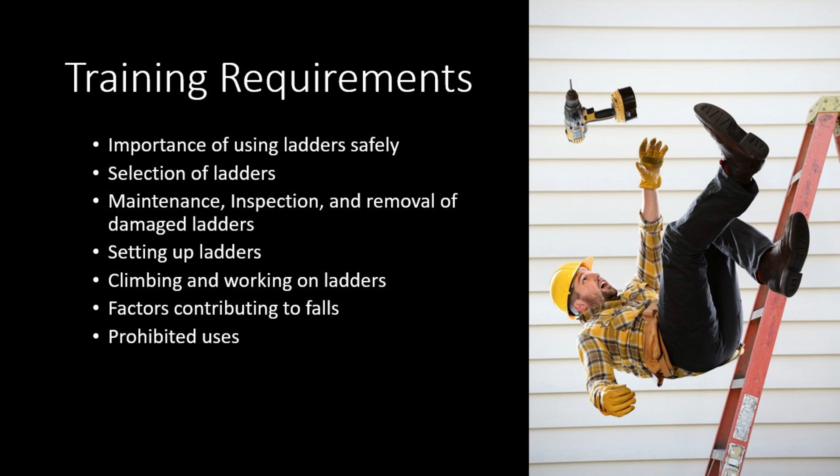The importance of using ladders safely. Do any of these numbers surprise you? Approximately 300 people die each year from ladder-related injuries. About 165,000 Americans require medical treatment for ladder-related injuries each year. Of those, almost 10% result in hospitalization. The most frequent injuries were fractures to legs and feet, and most accidents happen at home.

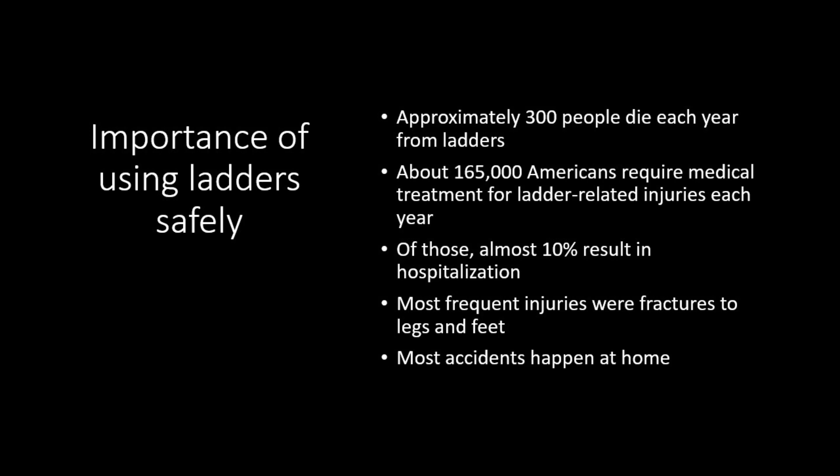Let's put that last slide into perspective. The most common ladder used is an 8-foot ladder, and the highest step to safely stand on would be approximately 6 foot high. A fall from 6 feet can generate as much as 2,400 pounds of force. That is a lot. A fall from a ladder is a lot more dangerous than you may think. People have died from falling even as little as 4 feet off a ladder.

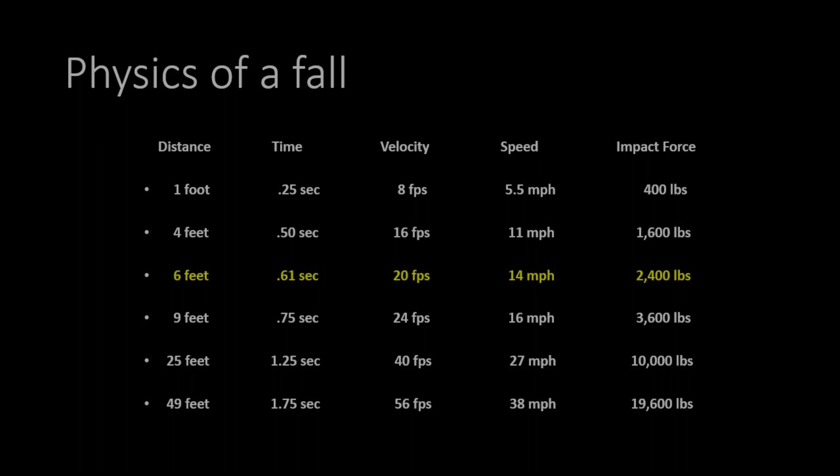Now, selecting a ladder. Employees shall only use Caltrans-provided ladders. Make sure you are comfortable ascending and descending the ladder provided. You cannot use a ladder brought from home, and definitely not a ladder you found on the freeway. Always use a ladder that is appropriate for the job task. Ladders shall be selected, and their use restricted, to the purpose for which the ladder is designed.

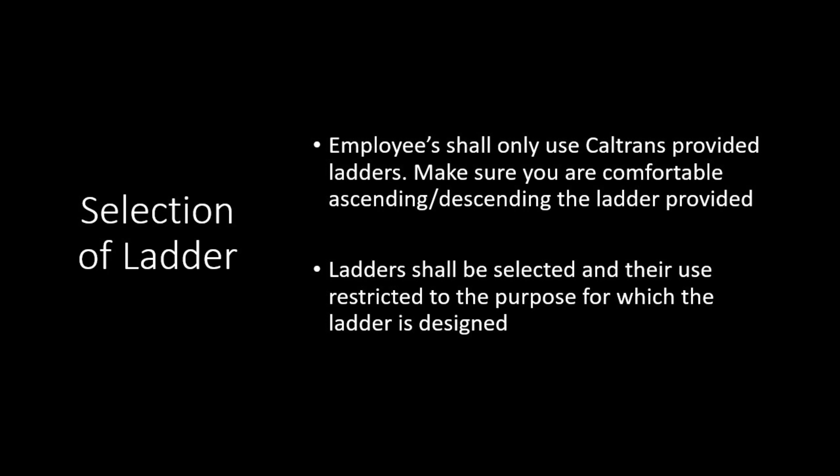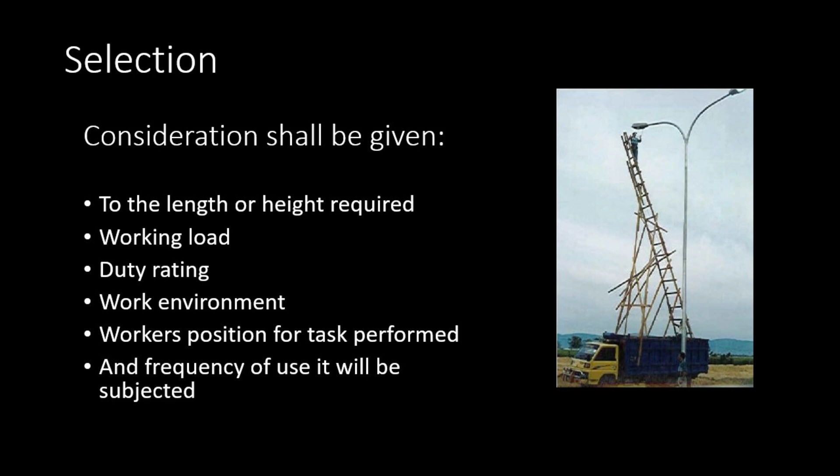Consideration shall be given to the following: the length or height required, the working load, the duty rating, the work environment, the worker's position for the task to be performed, and the frequency of use the ladder will be subjected to.

Now would be a good opportunity to pause this video and take a look at the ladders you have. Go ahead and pause now. I can wait as long as you need.

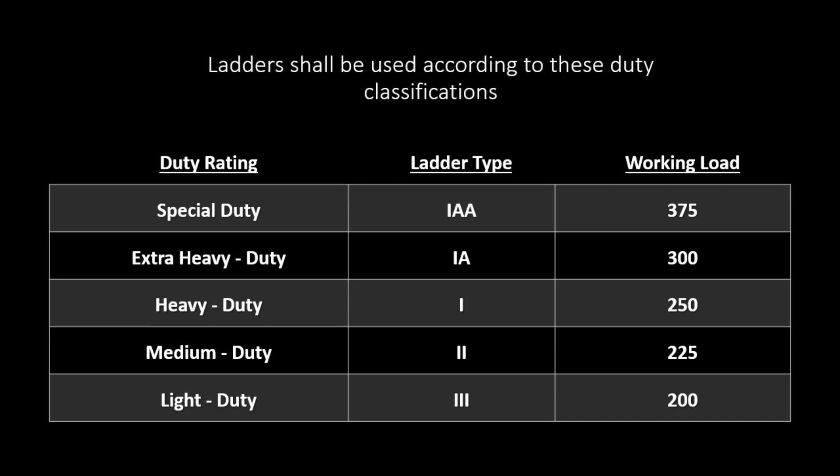Many ladders are color-coded. Heavy-duty ladders, Type 1, are blue and have a working load limit of 250 pounds. Extra heavy-duty ladders, Type 1A, are orange and have a working load limit of 300 pounds. Remember, it is not just your body weight. Also factor in such things as tool belts, gear, or other equipment you may have on the ladder with you.

Ladders shall be maintained and in good condition at all times. The joints between the steps and side rails shall be tight. All hardware and fittings shall be securely attached. Movable parts shall operate freely without binding or undue play. All safety and warning stickers must always be legible, or the ladder should be removed from service.

Ladders shall be inspected monthly by the supervisor for visible defects and after any occurrence that could affect safe use. Always inspect ladders before you use them. Even after a monthly inspection, something may have happened to the ladder since the inspection. Remember, you are the one climbing the ladder. Just like you would pre-op your vehicle before operating, the same goes for a ladder.

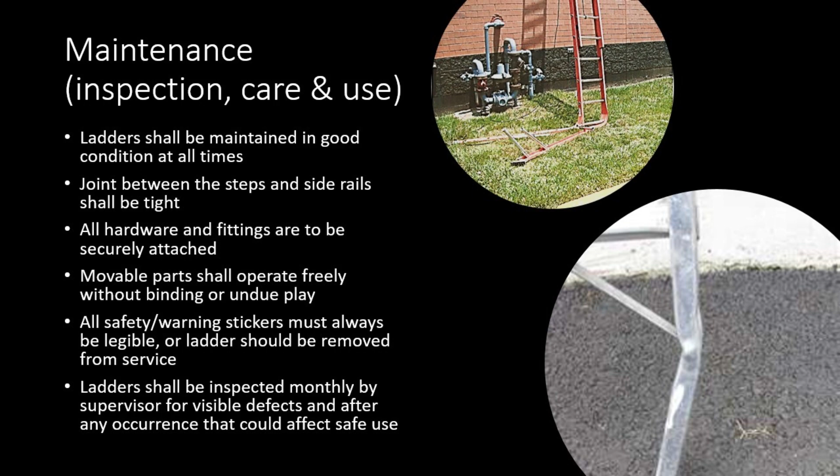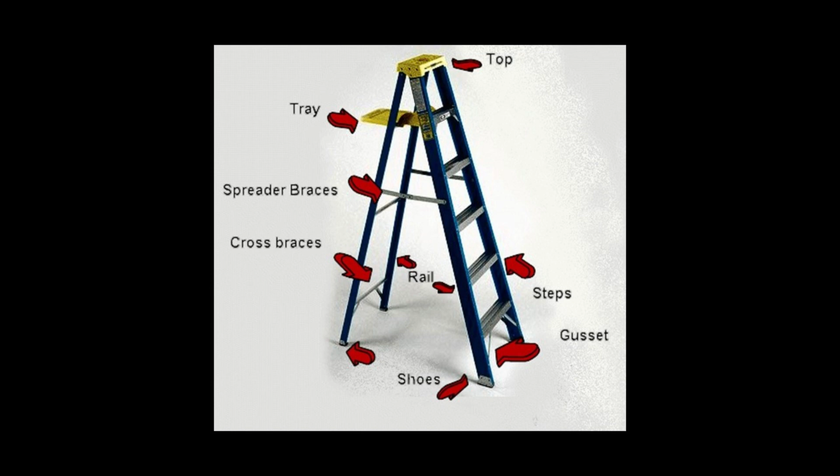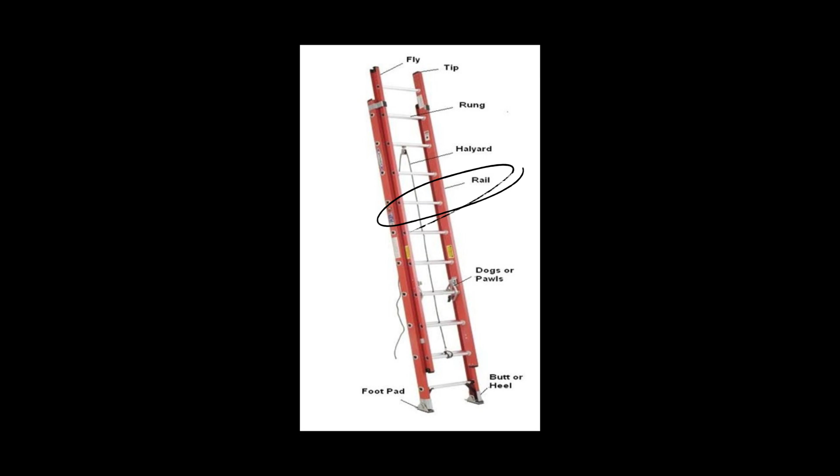Here are the various parts of a ladder: the top, the tray, spreader braces, cross braces, rails, steps, gussets, and at the bottom, shoes. This is a typical extension ladder. The fly is the section of ladder that extends up. The halyard, or rope and pulley, are used to raise the fly. There are rungs and rails just like the previous example. The dogs or pawls are what locks the fly at the desired height. And finally, at the butt of the ladder, or heel, there are foot pads.

Inspections, care, and use. Templates for ladder inspections can be found online. I placed a link to one in the video description. You can always ask your management for one too.

Just like fire extinguishers and eye wash stations, these inspections should be done monthly. They shall be legible and readily available at all times. If a defect is discovered, take the ladder out of service until it can be repaired. If the ladder can't be repaired, you must destroy it.

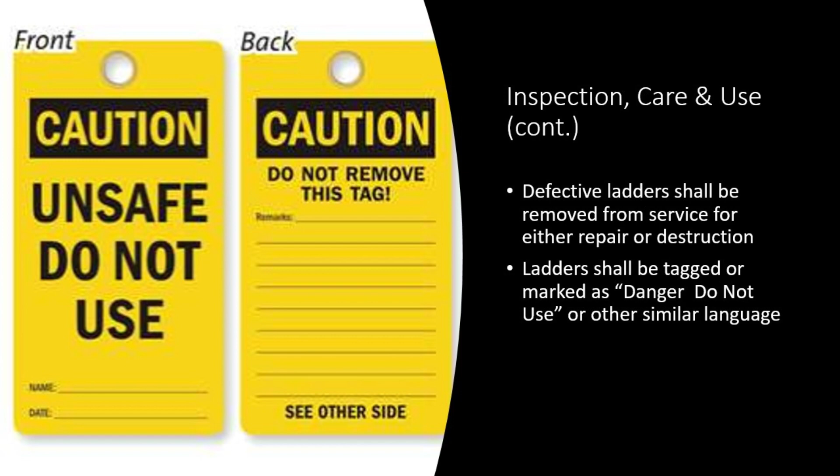Do not throw a ladder in the dumpster in one piece. Always destroy it to prevent the ladder from being used again. Use a loader bucket, a sawzall, or other means to destroy it. Defective ladders shall be tagged or marked as 'Danger, do not use,' or other similar language.

Ladders shall be free of oil, grease, or any slippery material. Wooden ladders shall not be painted with anything other than a transparent material.

Question: if you painted a wooden ladder with anything other than transparent paint, why might that be a problem? Well, the solid color paint could hide cracks or other damage to the wood. The ladder may have hidden defects, and you might not know.

Be sure you find a ladder that is appropriate for the job. Portable ladders shall not be overloaded when used. Ladders shall not be placed on boxes or barrels, on equipment, on furniture, or other unstable base used to obtain additional height. Let's pause a moment to take a look at your ladders.

Have they been inspected recently? Are there any defects you can find? Are the manufacturer's labels legible? Let's pause here to check.

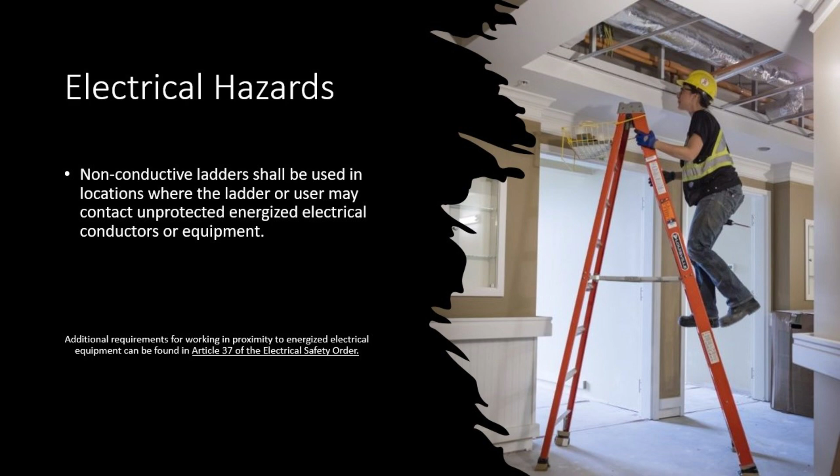Setting up ladders. Non-conductive ladders shall be used in locations where the ladder or user may contact unprotected energized electrical conductors or equipment. Never use aluminum ladders while doing electrical work.

Ladders shall be placed on a firm and level footing. Ladders shall not be used on ice, snow, or slippery surfaces unless suitable means to prevent slippage is in place.

Uneven ground is common along the shoulders of our roads. This is an issue for crews that deal with the installation and repair of signs. If a suitable surface is unavailable, you should not utilize a ladder at that location.

Do not place ladders in doorways, driveways, or locations where it could be displaced, unless you protect your workspace with a suitable barricade. You don't want someone opening that door while you are on the ladder. Maybe you are in a warehouse or shop that may have a forklift driving through. Be sure to protect your workspace. A lookout could be utilized for protection where cones or other barriers are insufficient.

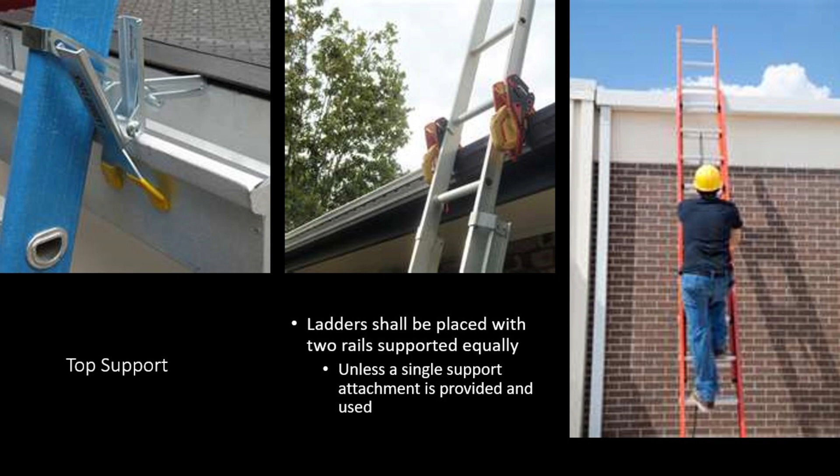Extension ladders shall always be erected so that the top section, the fly section, is above and resting on the bottom section with the rung locks engaged. On older ladders, it is sometimes hard to determine if the ladder is forward or backward or even upside down because older extension ladders had round rungs. Newer ladders have flat rungs that are usually at a 45-degree angle, so you can only use the ladder one way.

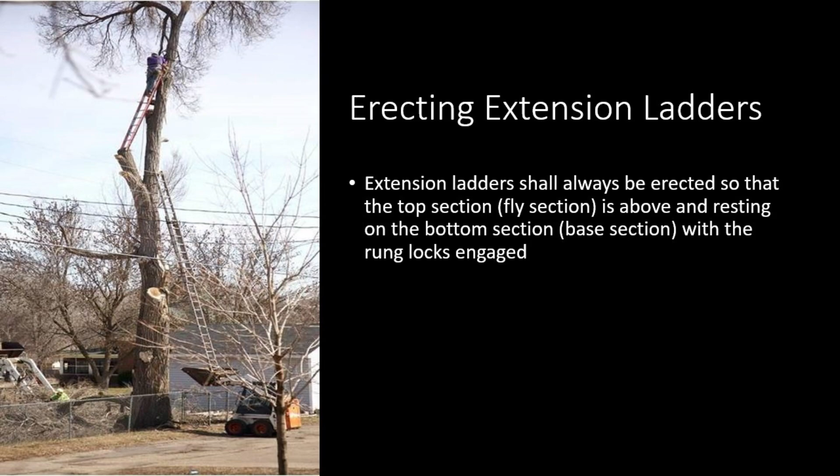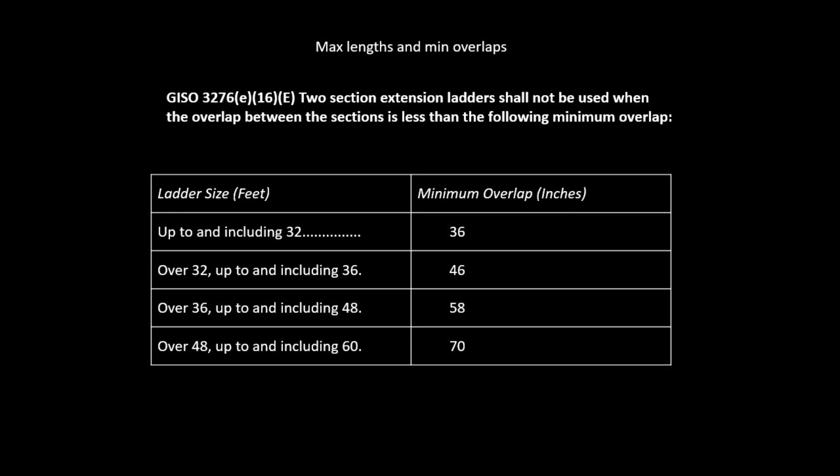The 4-to-1 rule. Where possible, non-self-supporting ladders shall be used at a pitch so that the horizontal distance from the top support to the foot of the ladder is 1/4 of the working length of the ladder. Otherwise, it shall be tied, blocked, held, or otherwise secured to prevent slipping.

If the ladder is out too far, it could change the load capacity and cause weakness in the center of the ladder. If the ladder base is too close to the wall, it could fall back when you reach the top. This is an example of a 1:4 ratio. For every 4 feet up, you need 1 foot out from your step-off point.

Okay, pop quiz. If you were using a 16-foot ladder, how far from the wall should the base be set? The base would need to be 4 feet from the wall.

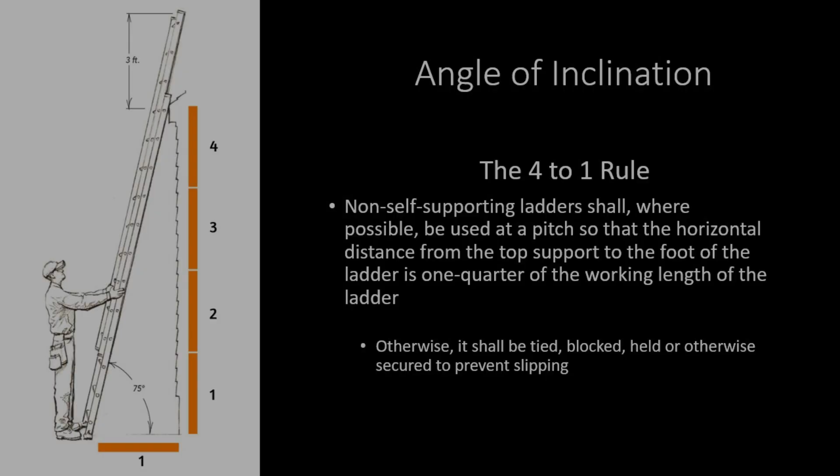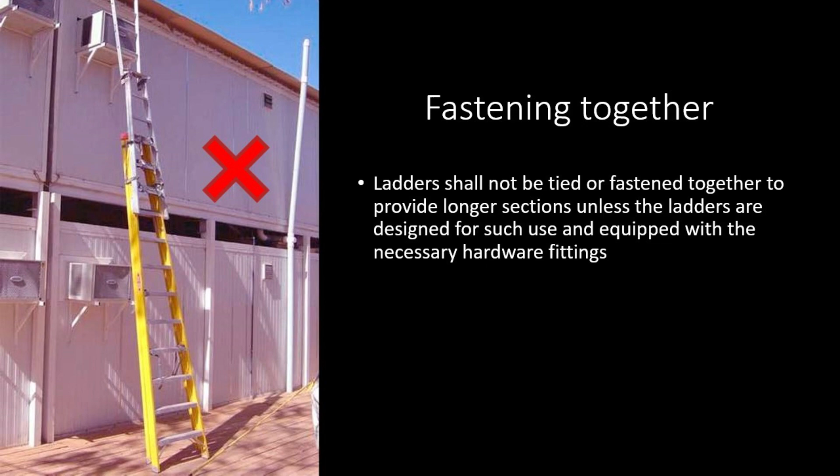Ladders shall not be tied or fastened together to provide longer sections unless the ladders are designed for such use and equipped with the necessary hardware fittings. Never duct tape or wire a ladder together. Always find a ladder that is right for the job.

Climbing and working on ladders. When ascending or descending a ladder, the user must face the ladder and maintain contact at 3 points at all times. Employees shall be prohibited from carrying equipment or materials which prevent the safe use of ladders.

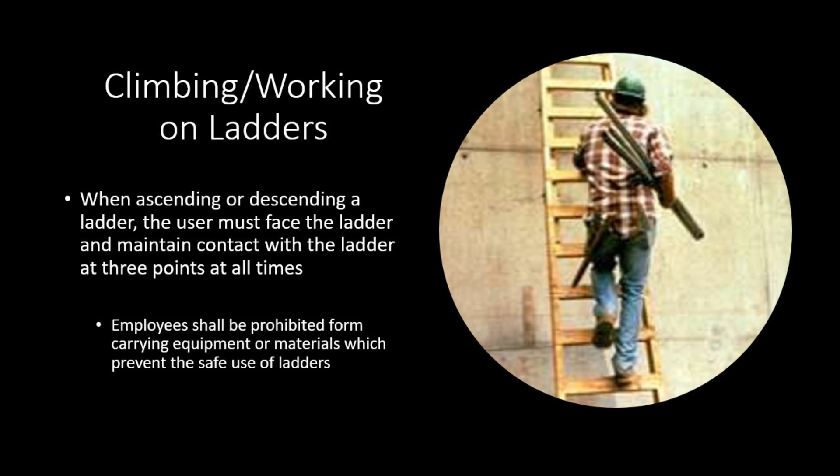You should never carry anything in your hands while using a ladder. Once you are on the landing, you can retrieve material using a rope and bucket. A tool belt may be used to carry small hand tools and parts.

Ladders are to be used as they were designed. Climbing on cross-bracing, placing on boxes, barrels, or other unstable bases to obtain additional height is prohibited.

Employees shall not sit, kneel, or stand on the top cap or the step just below the top cap. The pail shelf or rear cross-bracing is prohibited as well. Exception: employees may stand on the step below the top cap provided it is located 18 inches under the top cap.

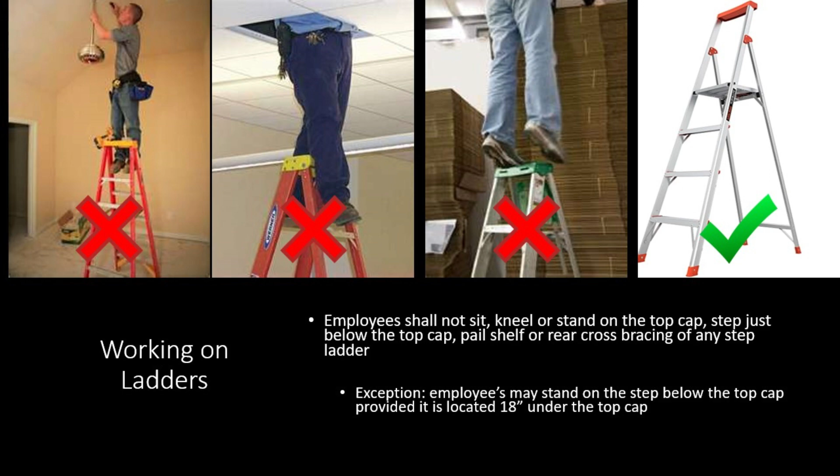As you can see, the ladder with the green check has the first step 18 inches below the top cap, so you are allowed to stand on that step. You might see ladders like this in a warehouse or at the wash rack.

Employees shall not stand or work off the top 3 rungs of a single or extension ladder, unless there are members of the structure that provide a firm handhold, or the employee is protected by a personal fall protection device. In this picture, she could lose her balance very easily, but if she has 3 rungs in front of her as required, she would be able to use the ladder for stability.

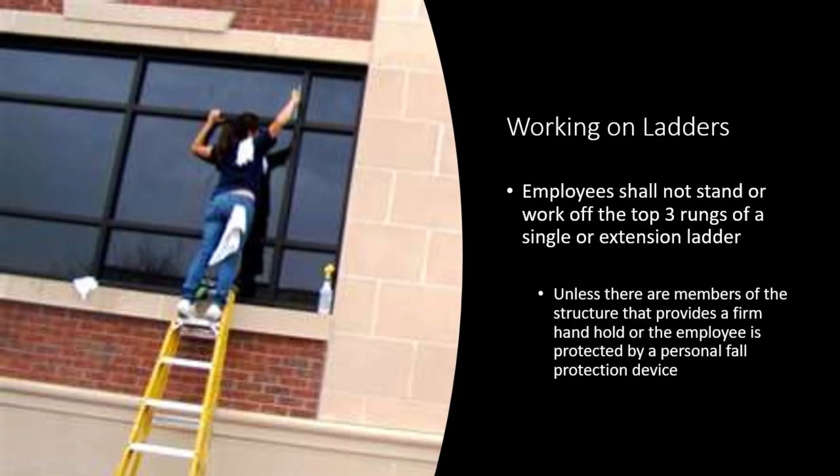Side rails shall extend not less than 36 inches above the upper landing surface. If you just count 3 rungs above the landing, you will have 36 inches because the rungs are 12 inches apart.

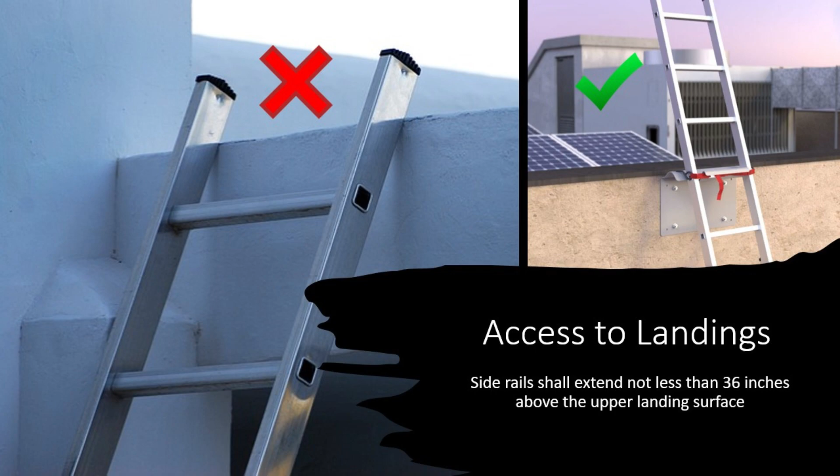Employees shall work near the middle of rungs and shall not overreach. A simple rule of thumb is to keep your belt buckle in the center of the ladder at all times. If overreach is necessary, then the top of the ladder shall be secured and employees shall wear personal fall protection.

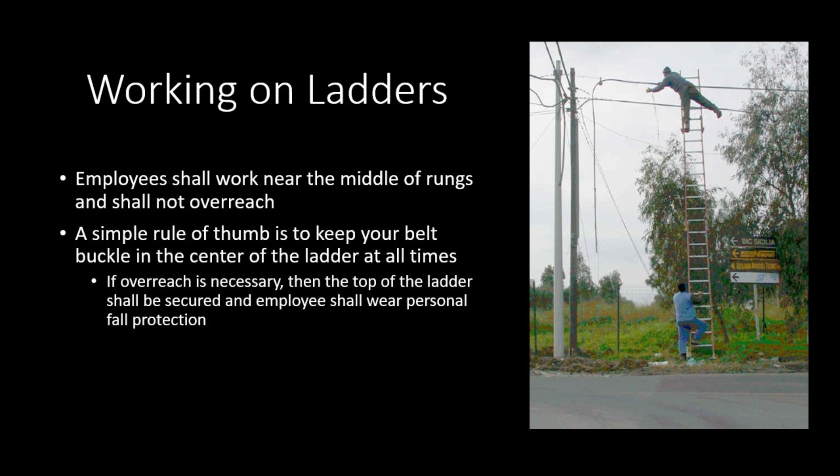Ladders up to 15 feet in length can be carried by 1 person. If the weight of the ladder is too heavy for 1 person, ask for help from a coworker to move the ladder. Ladders exceeding 15 feet in length should always be carried by 2 people. Don't be afraid to ask for help. Work smarter, not harder.

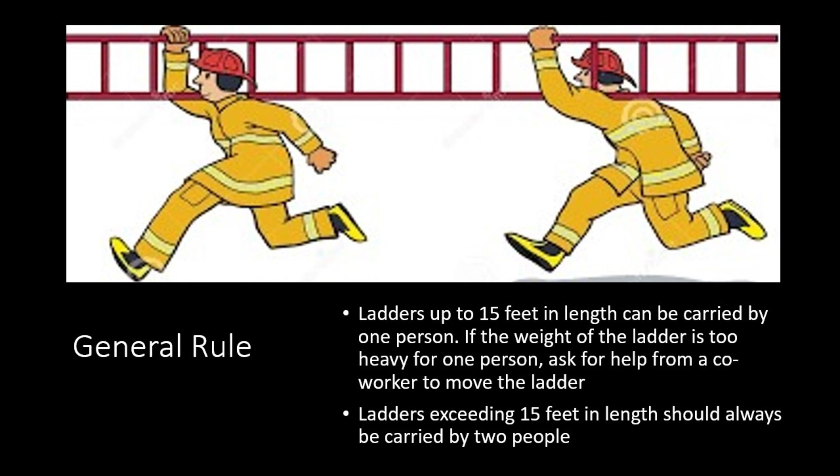Okay, time for a field trip. Take a look around your facility or work location. Identify a few spots where you may need to set up a ladder. Do you have the right ladder for the work? Will you need a spotter or some physical barrier to protect your ladder? What are some hazards specific to your locations? Go ahead and pause again.

Factors contributing to falls: reasons people fall from ladders include, but are not limited to, haste, sudden movement, lack of attention, improper footwear, and the user's physical condition.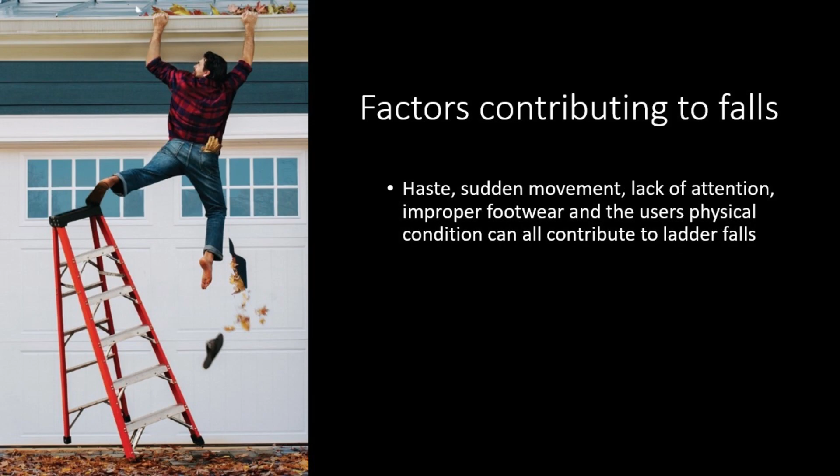Do not stand on the top cap. Read and follow all warning labels. One thing to remember when inspecting ladders is all safety stickers must be visible and readable. Cal-OSHA requires that all decals be on the ladder, or the ladder must be removed from service.

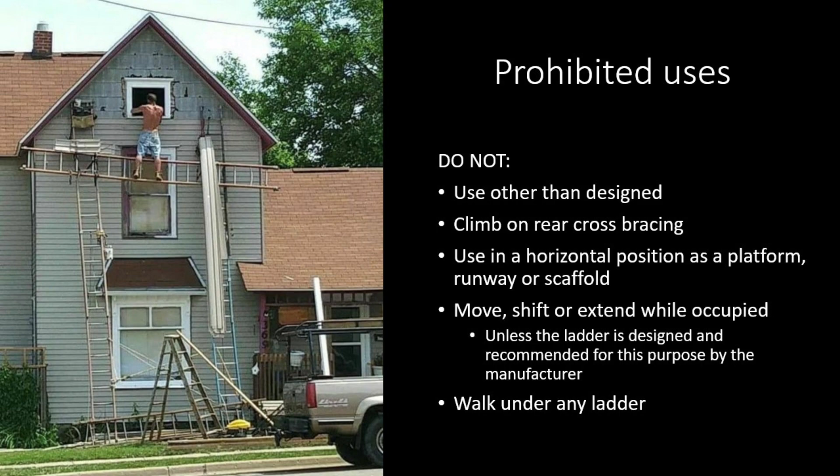Let's review. Keep your workspace clear. Always set ladders on firm level ground. And be aware of locations where your ladder could be displaced by someone opening a door or moving equipment.

The ladder on the right doesn't extend 3 feet above the landing and was set at too steep an angle. It is not appropriate for the work. The longer ladder is okay for the work, but the person holding the ladder chose to stand on the bottom instead of holding it. Now the combined weight likely exceeds the 300-pound capacity of the ladder.

In this scenario, there is no place to tie off. Using a spotter to hold the ladder is good practice. Do not overreach. Keep your belt buckle in the center of the ladder at all times.

If the worker needs to reach further, both the ladder and the worker shall be tied off. If you are the person holding the ladder, be aware of objects that could fall.

This ladder is not being used per the manufacturer's instructions. Step ladders shall not be used as single ladders or in a partially closed position. The ladder is not secured. It doesn't extend 3 feet above the landing. Also, it doesn't have an appropriate landing.

You shouldn't have to crawl under or through a handrail. Just like working near the highway, be aware of your surroundings and plan an escape route. Should something go wrong here, this worker could be impaled by rebar.

There appears to be a radio, a measuring tape, and a pencil in hand. Remember to put away any tools in your hands prior to ascending or descending a ladder.

Side rails shall extend not less than 36 inches above the upper landing surface. In this case, the ladder would have to be tied off. Once this ladder is tied off, the lower landing must be improved as well. The lower landing is not appropriate as is.

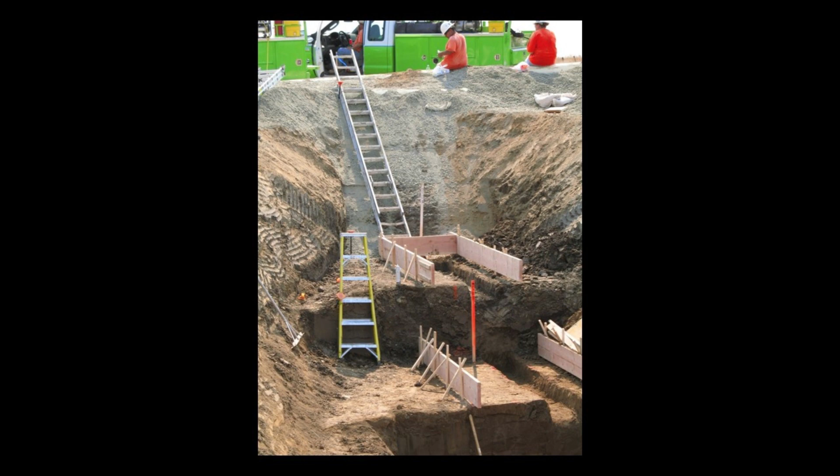Note that both of these ladders extend 3 feet above the landing, and the contractor has elected to secure the ladders. Always take the time to work safely. There is no job so urgent or task so important that we can't take the time to perform our job safely.